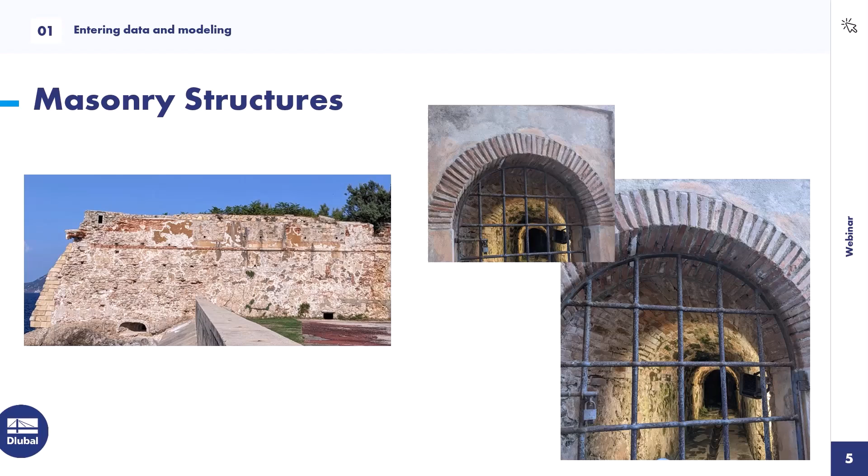This is the reason why I prepared two examples today. One structure as a basement with arched surface on the top, and as the second one, a simple example of a bridge, where I want to show how you can estimate the maximal possible load on this structure using the stability analysis tool. That's all for the beginning, so let us start and switch to RFEM.

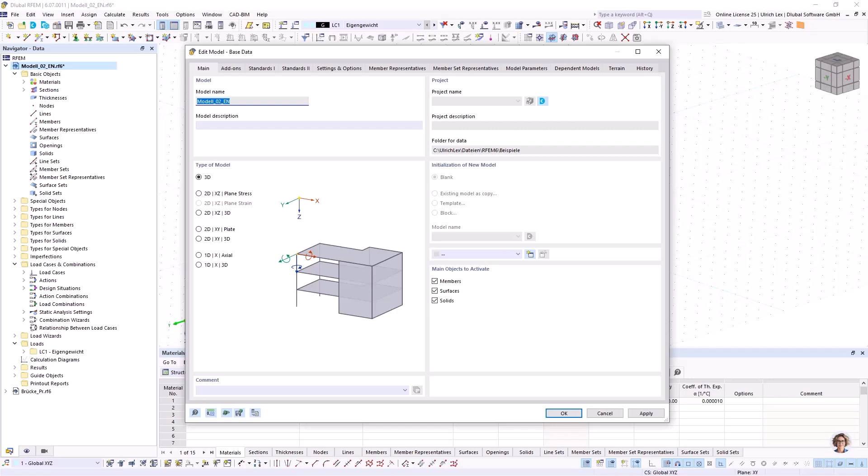So I already created a new file in RFEM. The first thing I want to do is take a look at the base data on the main sheet - there's no changes for the default settings. What I want to take a look at is the add-ons. Here I have to check our masonry add-on to get the things I need for masonry.

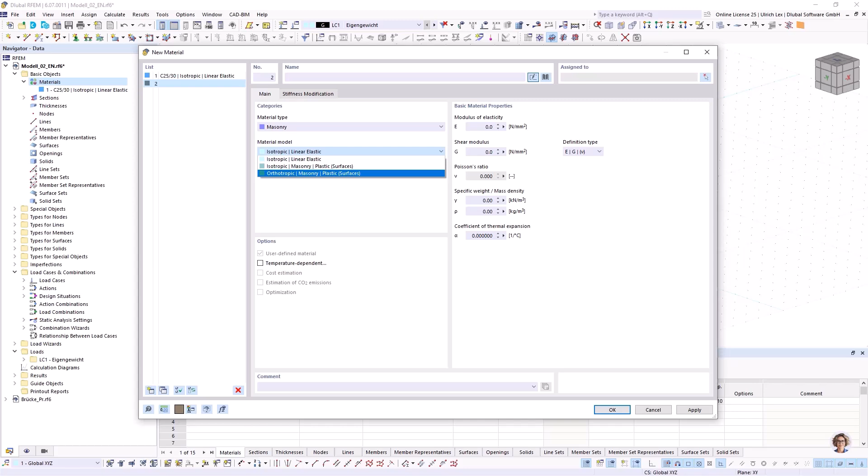When I have done this, I can continue with creating new things. At the beginning, I want to create a new material. One material already exists, it's a concrete, which I want to use for the foundation maybe. The second will be created new. I choose the material type masonry, and here our material model orthotropic masonry. Go to the material database, select our masonry and select one special material, continue with OK. Then my needed data is filled in automatically, along with the parameters I need for the material model. The first step is done, the material is created.

The second step, I want to create a new thickness for my surface. At first, the foundation, maybe 250 millimeters. Apply, create one new thickness with masonry, and continue with OK. If I have done these settings, then I can start modeling.

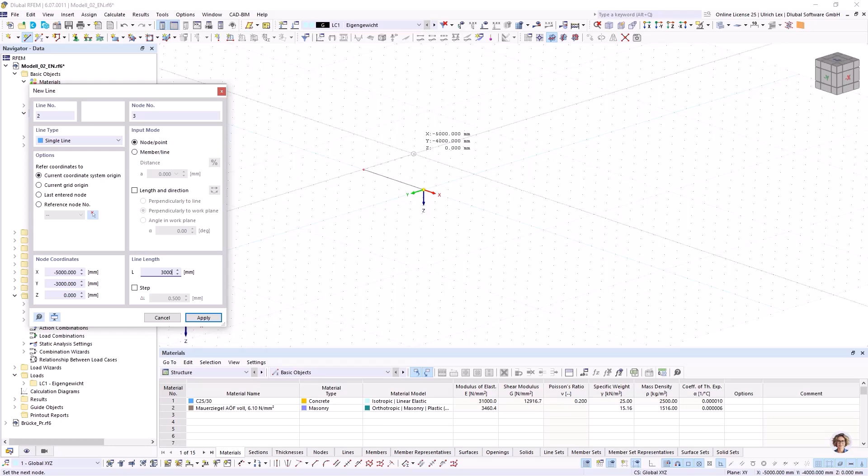My building is a very simple building, so I can create it only with lines or directly with surfaces, and I don't have to use any data import or DXF file. So I want to start here and have in this direction 5000, here 3000 millimeters. I can also change this from millimeter to meter - it's maybe better for bigger buildings.

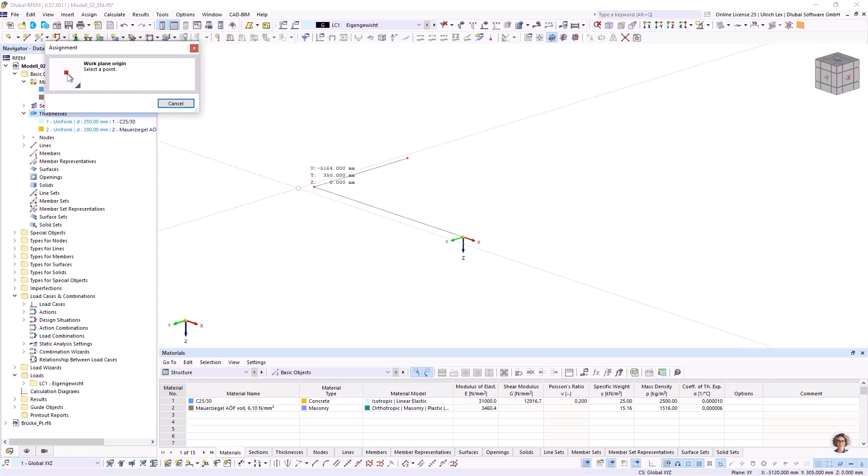So I can copy this line and create the line in the front. I can switch the working plane. I had to change here the settings in options, units, and here the length from millimeter to meter.

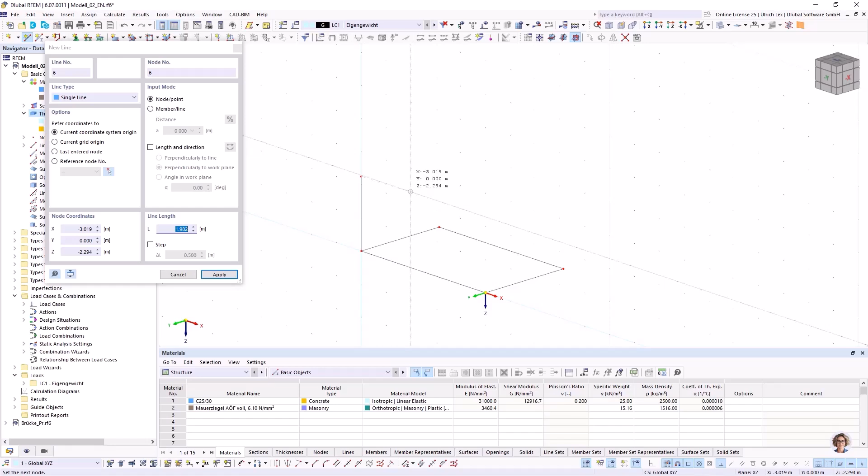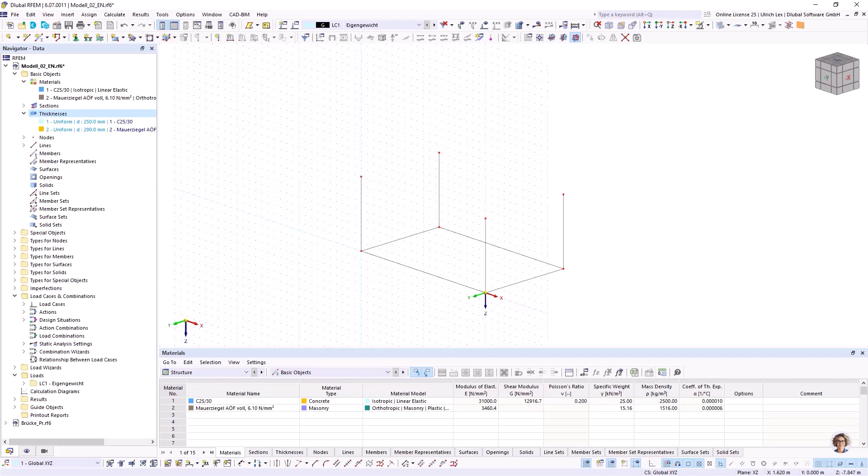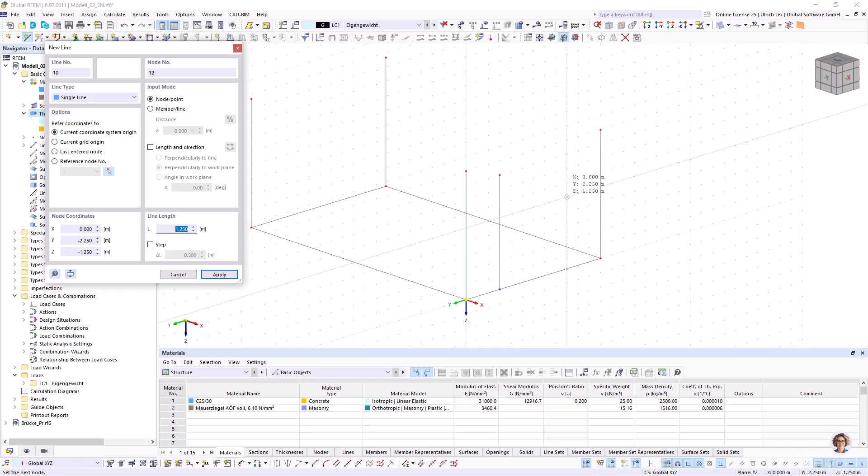Okay, and now my space is 1 meter. So now I can change it. That was what I wanted. I switch my working plane and want to create here one door. So for better modeling, I can now select only the lines in the front.

Can create a new arc.

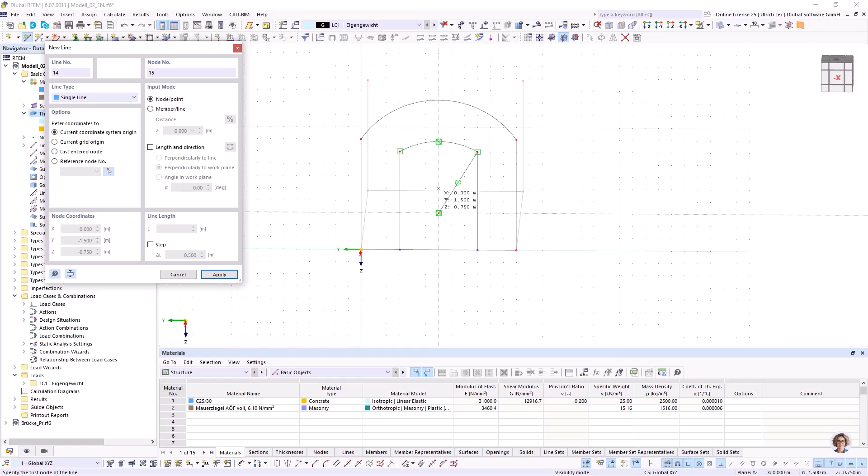Can create here now 2 lines, maybe 2 helper lines. There were created 2 additional nodes. This is not good, so that's why I can use our tool.

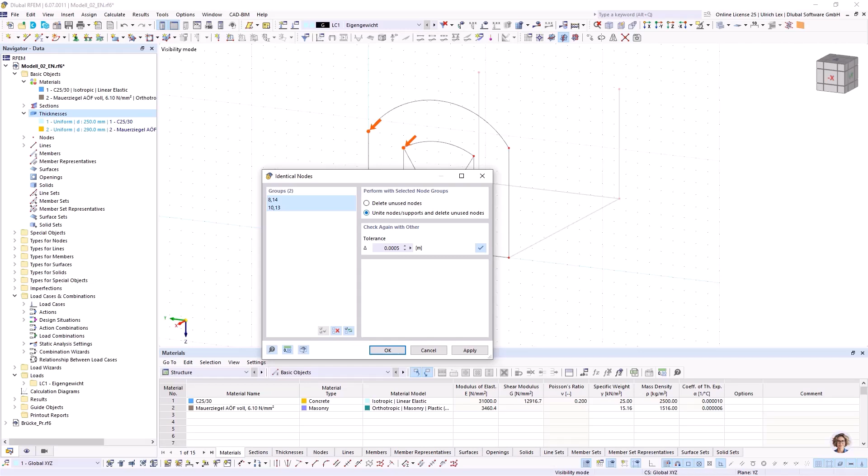Model check and look after identical nodes. You see there were 2 nodes here, and I can use this option, delete the unused nodes. Then there is only 1 node available. Here I created this helper lines.

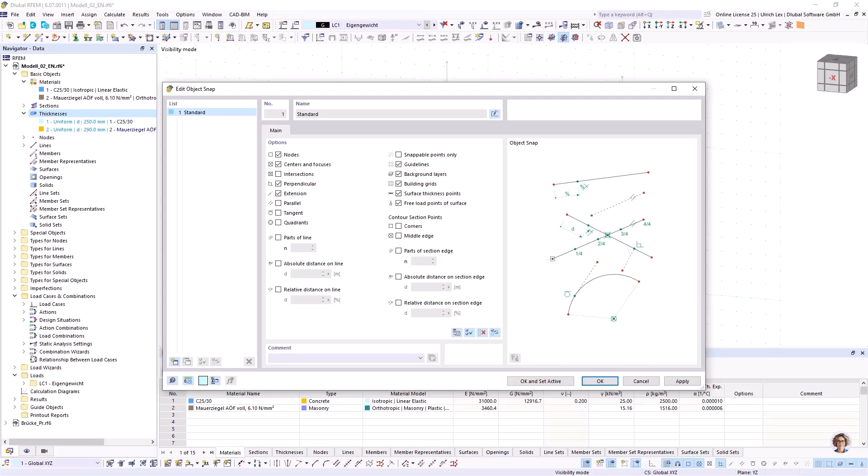I can activate our extension for lines. Then I can choose this node, go a little bit back. When the yellow cross is coming, then I can extend this line and choose my length. The same on the other side.

A little bit back and extend this line. And the next steps, I use this arch again. So after this, I can delete my helper lines.

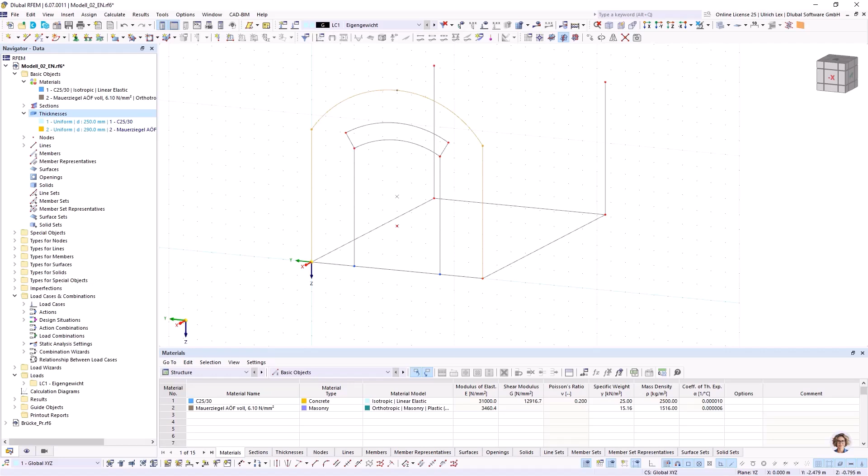So that's easy modeling. I can cancel this visibility mode. I can select the structure and copy it. I can add here some lines. And my easy building is ready.

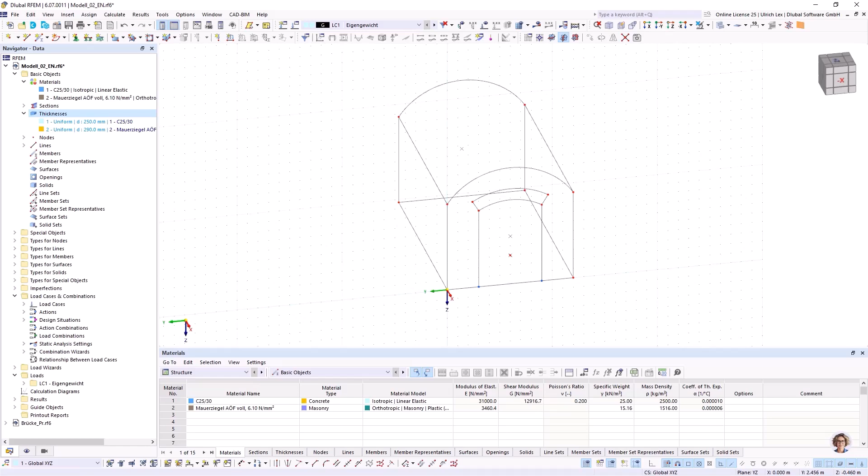I can save this structure, and after that I will continue with creating the surfaces. I use here the option select boundary lines, because now there are all boundary lines available.

For my foundation, I use the concrete material. Okay, select here my lines.

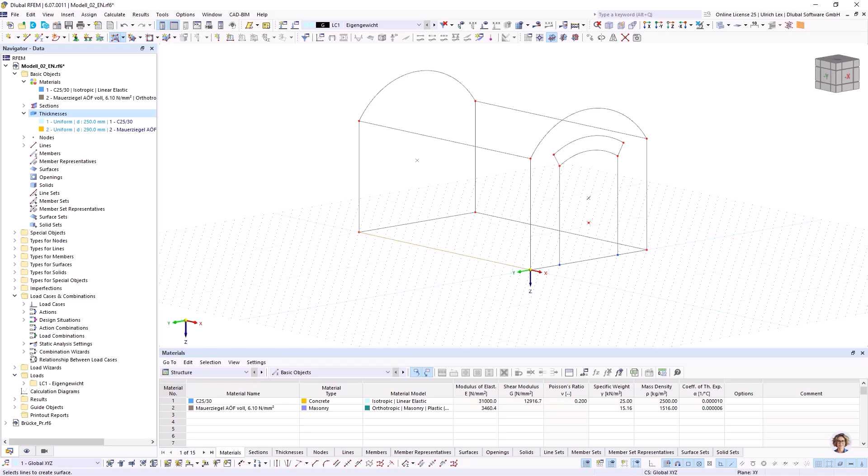So one thing I have seen, here are automatically created nodes on lines. Maybe it would be better to have separate lines, so I can use this option connect lines and nodes. After that, the line is divided and the node is displayed as a red one.

I continue with select boundary lines, choose my thickness for material, masonry, and can create some masonry surfaces in an easy way.

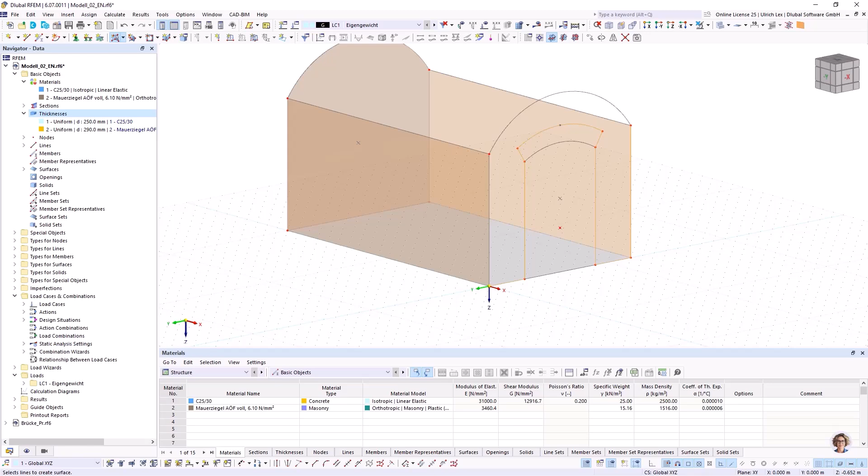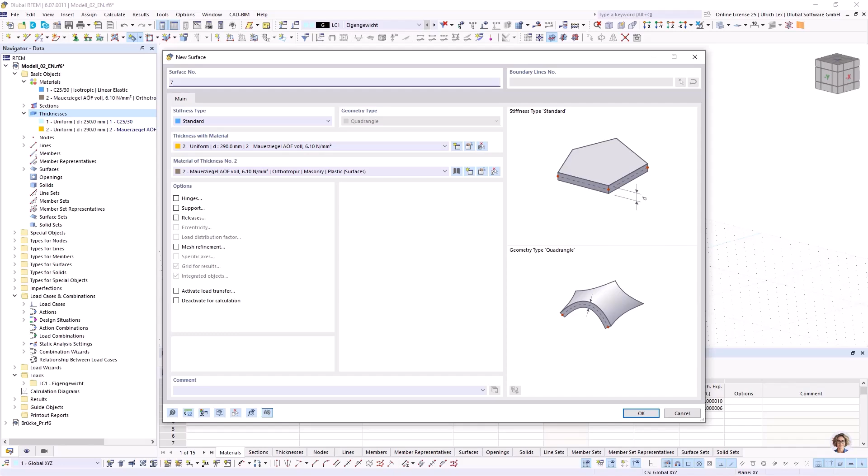So here I want to create a separate surface, and also for the surface on the top I need not a plane surface, I need here a quadrangle surface, also with the thickness of the masonry material. Okay, and choose the boundary lines, and ready is my easy building.

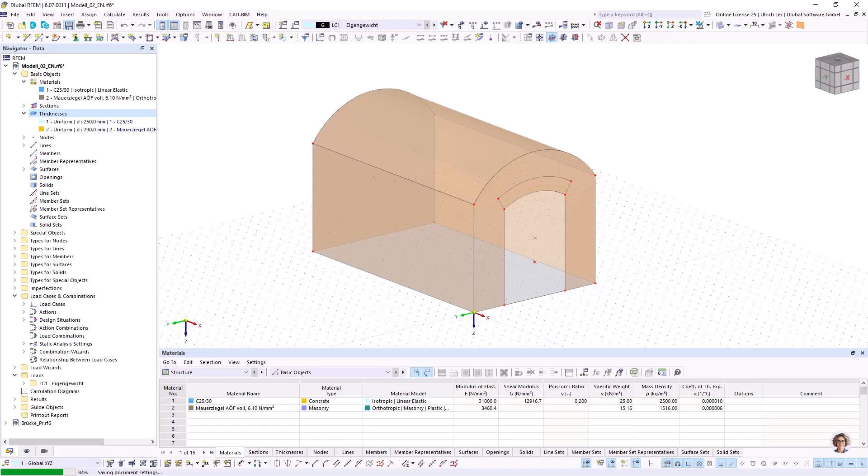So as a next step, I want to take a look at the supports. With double click on the surface, I choose a rigid support.

So a special thing for masonry material is to take a look, one view on the axis systems of the surfaces. For interpreting the results, it would be better that the local Z direction is oriented to the same direction. Maybe it would be good if all surfaces, maybe from the wall, are oriented to the inside of the building or to the outside of the building. So I can explain it later better, because we have here results for the minus side or the plus side.

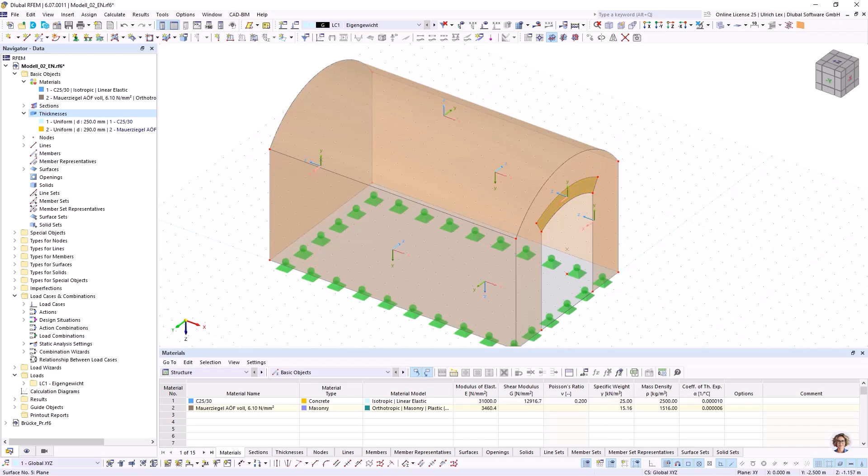And this is connected to this local Z-axis. So I want to change it, that all Z directions look to the inside of the building. Here it's okay. Right click and reverse the local axis system.

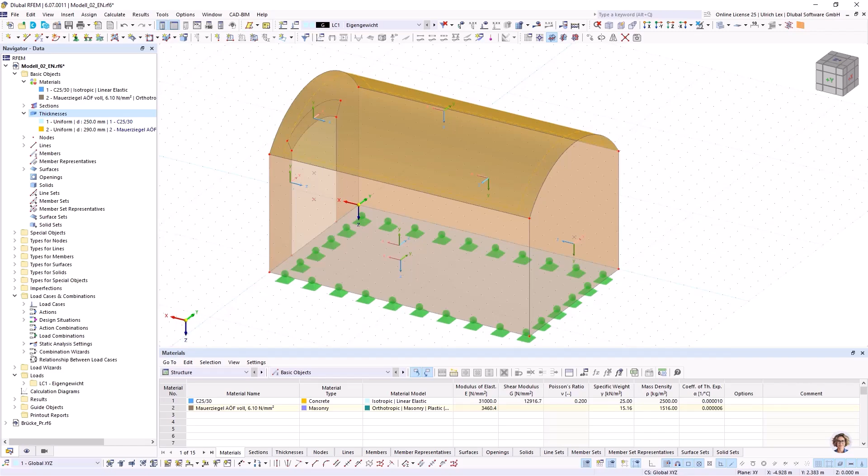And at the last, what's this? Okay. So for this arched opening, it would be good when the y direction of the surface would be oriented to the arch.

This can be done when I go double click on the surface and take a look on this specific axis, input axis, use here axis parallel to lines, can choose my y axis and can define that it should be parallel to this line number 11.

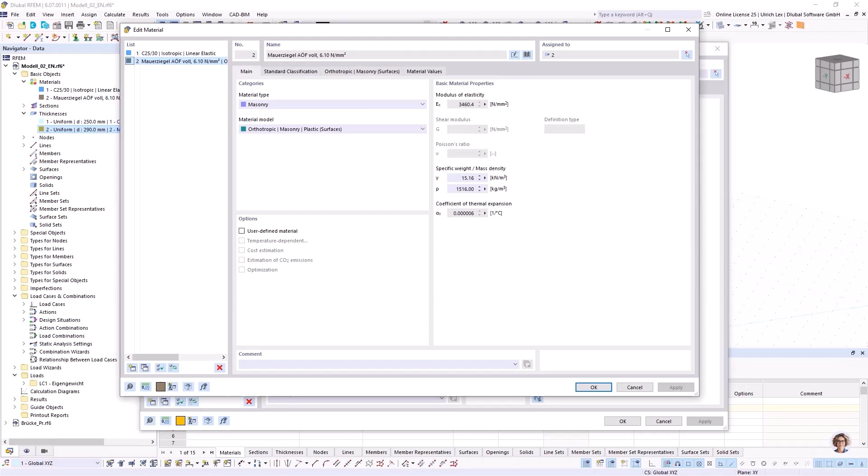It is necessary because the masonry material does have two directions, and the y direction is normally the strongest direction. And this is the direction what the load should be acting.

Okay, as a next step, we can take a look at the mesh settings. The mesh settings of masonry structures should be around 25 centimeters. Of course, it can be necessary that this length have to be smaller.

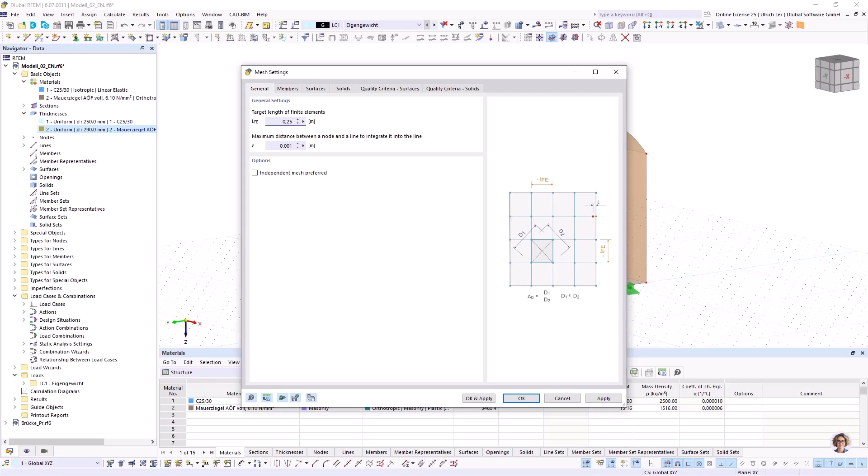Then you can use this. We can use this member or this mesh refinements, or it can be necessary that the mesh settings or the mesh is bigger. But normally it should be used about 25 centimeters.

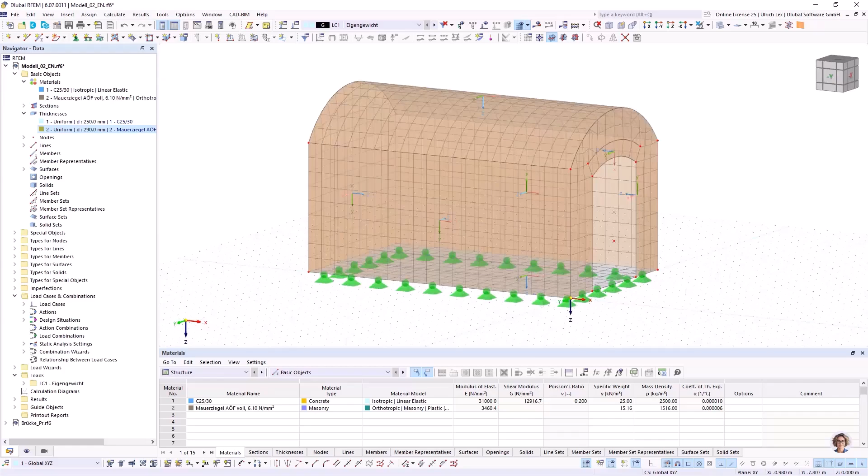Okay, the settings are done, then I can take a look at the mesh. Continue with OK. The mesh will be generated, and the mesh is fine. It's a regular mesh, so I think it is okay for this structure.

Here we see, when I separate this surface, we can see that the y direction is oriented according to line number 11, and it's better to see when I activate the axis system of the FE elements. Then we can see this y direction is oriented according to the line.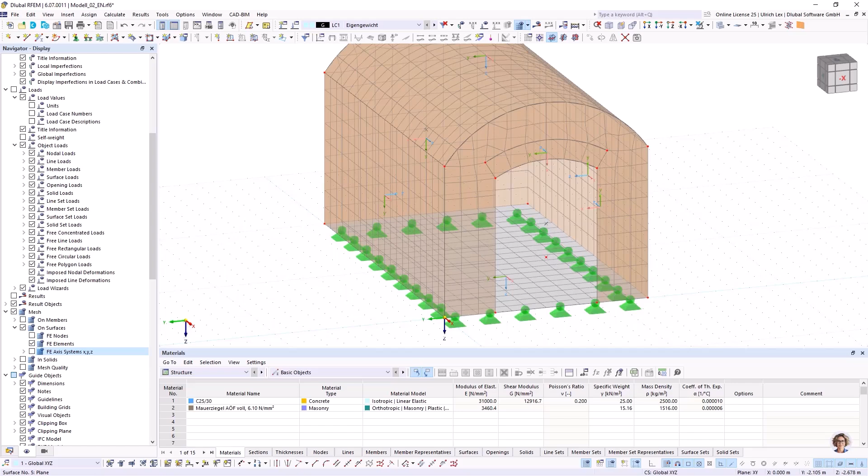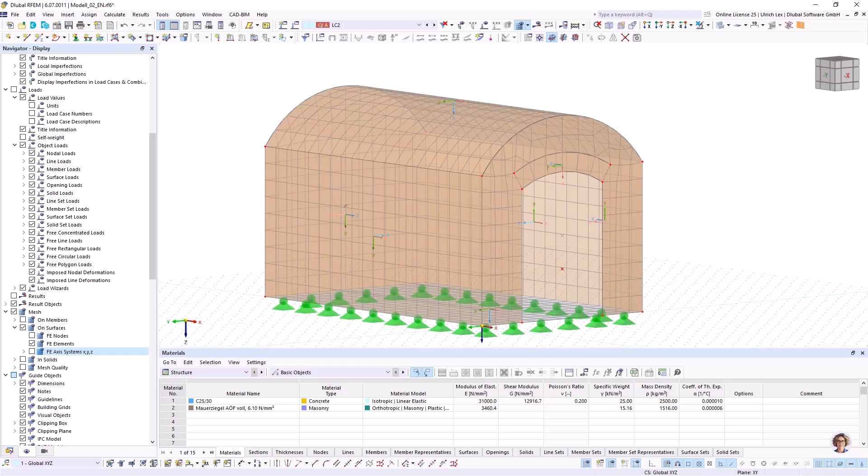Okay, the next step are the loading. Here I want to create a second load case. The first load case is my self-weight. As a second load case, I want to create a surface load with 10 kilonewton per square meter acting as projected on an area.

Okay, the load combinations are created automatically. Here I want to modify

the static analysis settings. For masonry, it's normally used even geometric nonlinear calculation or large deformations.

It's important to set some load increments, so that the whole load is not acting in one load step on the FE element. It's better if you choose here maybe 5 increments. When you want to see the results of each increment, we have the option to save the results, but you have to activate it.

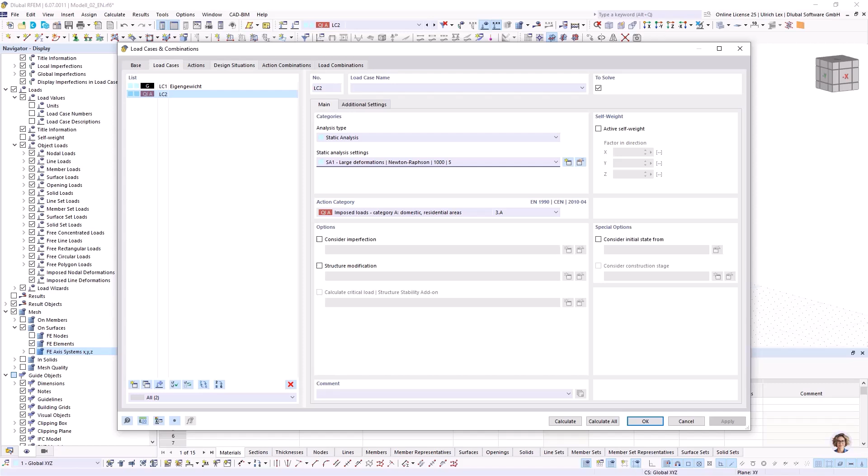Also, we have to set in the combination wizard that we want to use not second order, but the large deformation analysis.

Okay, after this setting, we can continue with calculation of the structure. So I press calculation.

At the calculation diagram, you can see the method of analysis, large deformation. You can see here the load increments where the solver is computing, the load factor, and in the convergence diagram you see the displacement, the deformation of the system according to the load or the load increment.

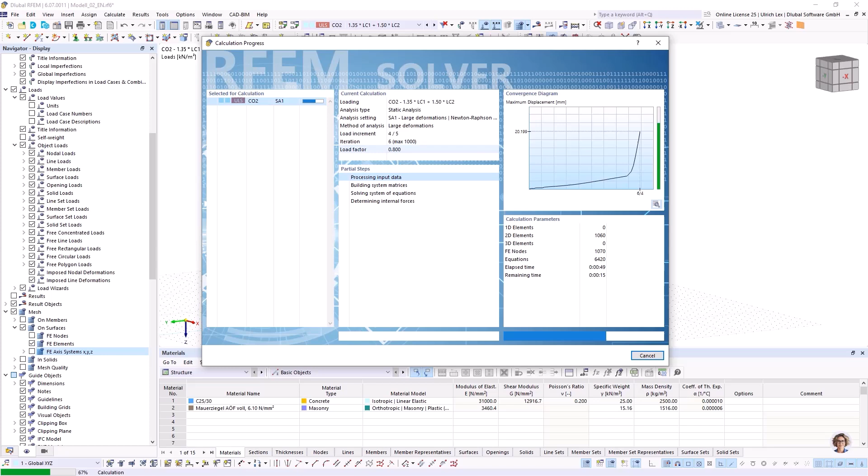Now we can see that the displacement, the deformation, is increasing with the load factor 0.8.

We could now wait until the calculation is finished, but it could be that we have to wait a long time and the calculation will not finish. So I will remember 0.8 and will cancel this calculation at this moment.

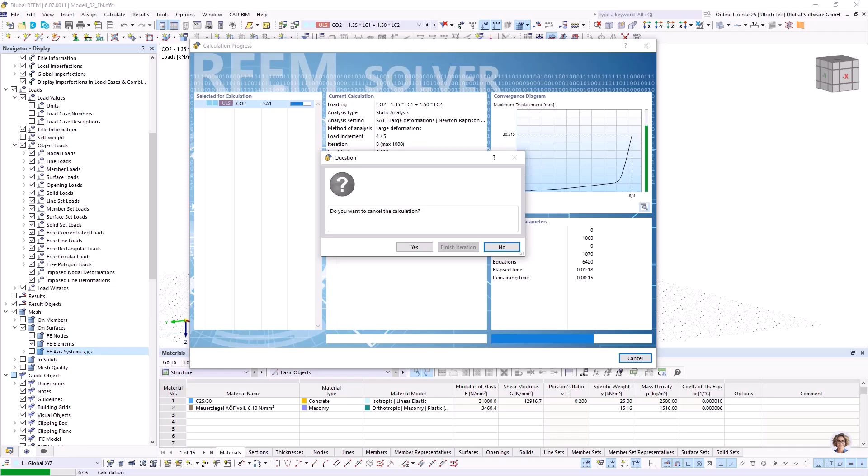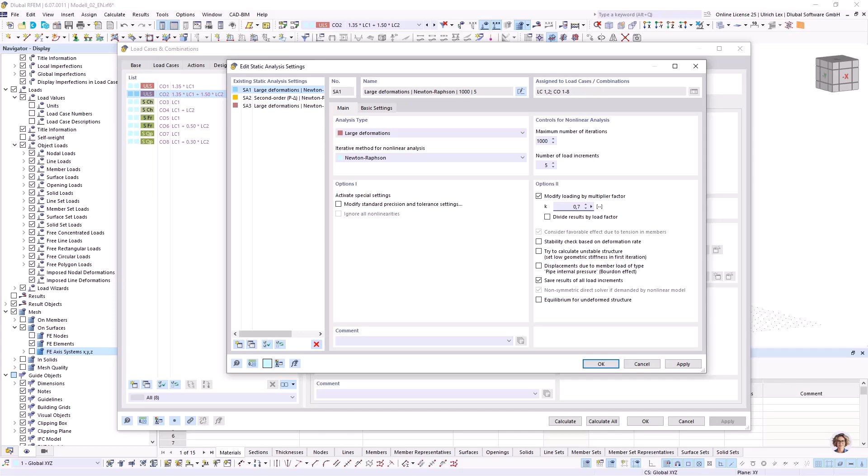What can I do to take a look at the deformations at this load factor? I can go to the load combinations, choose the option in the analysis settings and use this modify loading by factor, and insert here maybe 0.7. Continue with OK and calculate the structure again.

Then we can take a look at the results after this load factor, 0.7.

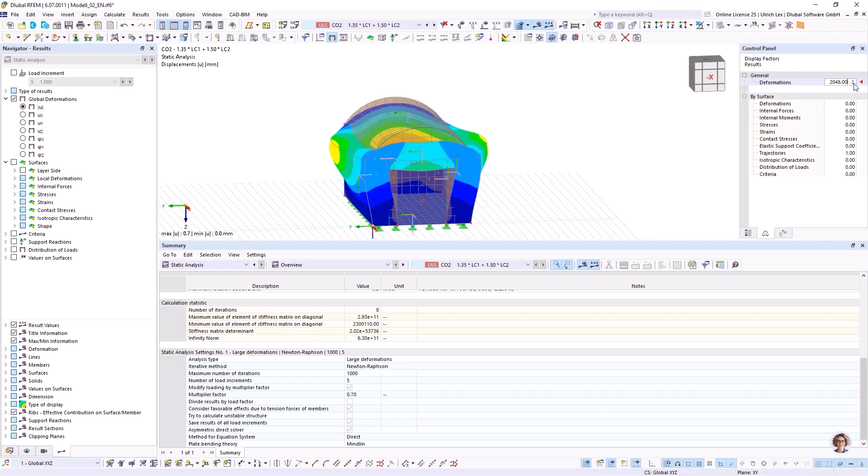What we see now, when we increase the deformations, what is happening? The surfaces on the right and left side get a big deformation. I think it's clear because this arched surface creates some horizontal load, and the masonry on the side surfaces can maybe not handle such big horizontal loads.

So maybe when we have to compute the structure in reality, we have to think now if we forgot something, or what we can do so that it works again.

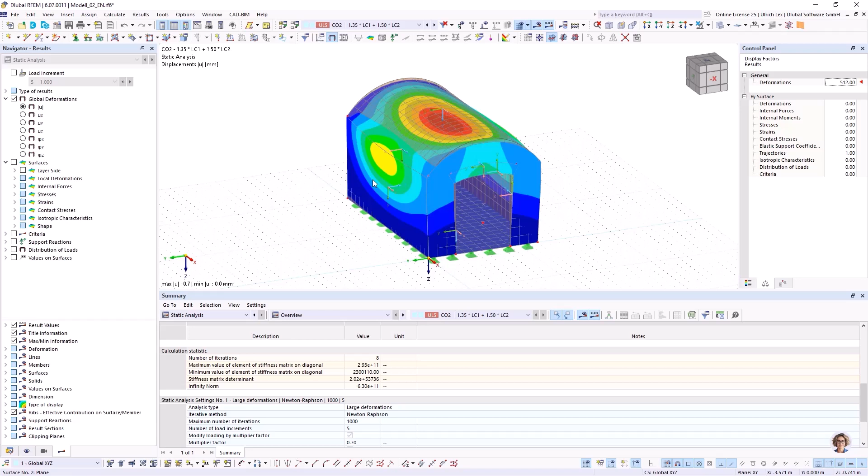There are many possibilities. Maybe we can create a new beam, a concrete beam, like a ring beam on top of this surface. Maybe you can create some additional concrete column,

or what could be done when it is a basement. It could be maybe to consider the earth pressure on the outside of these surfaces. And that was what I want to do.

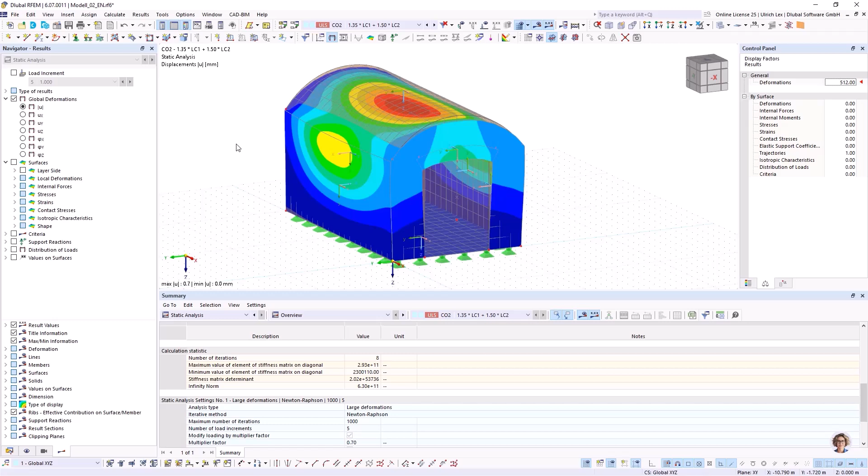Now, with double click, I want to consider some support. I want to create the new supports in local Z direction, maybe some spring constant. Yes, okay. And the same on the other side.

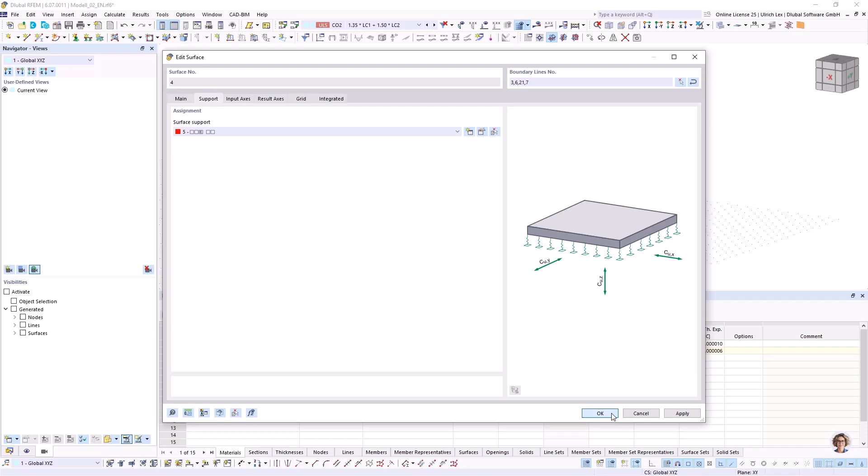I want to change my factor back to 1.0 and calculate the structure again.

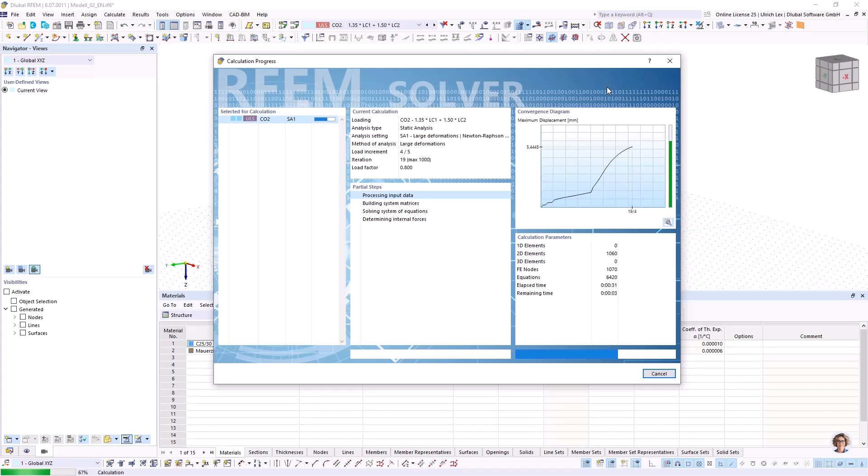Now I can see that the deformation is increasing too, but it's getting horizontal after some time. That means that was the right thing we have done.

Here it is the last load step, and we got more load, and the deformation is not increasing anymore. So the structure is computed, and this structure is okay for this load that is now computed.

So what can we do now for the result? The first thing is we can take a look at the load increments, but we have done it before. One interesting thing is the deformations.

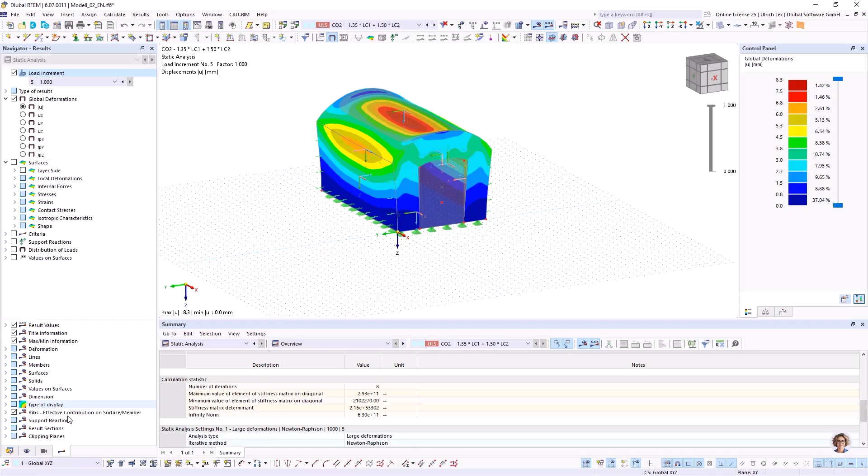These deformations you can also print to the printout report to create maybe a better view. You can insert some guide object and a clipping plane. You can create a new clipping plane here maybe.

Okay, just a moment. We have to see the YZ direction. And you can take off the clipped areas, so you can see this deformation.

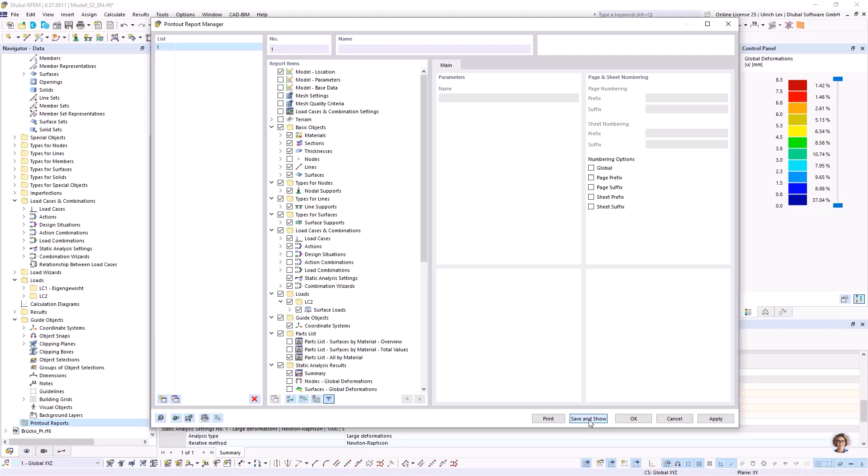We can create here a new printout report. Some tables are activated by default. Here you can activate or deactivate everything you want. Click on Save and Show, and the printout report will be generated.

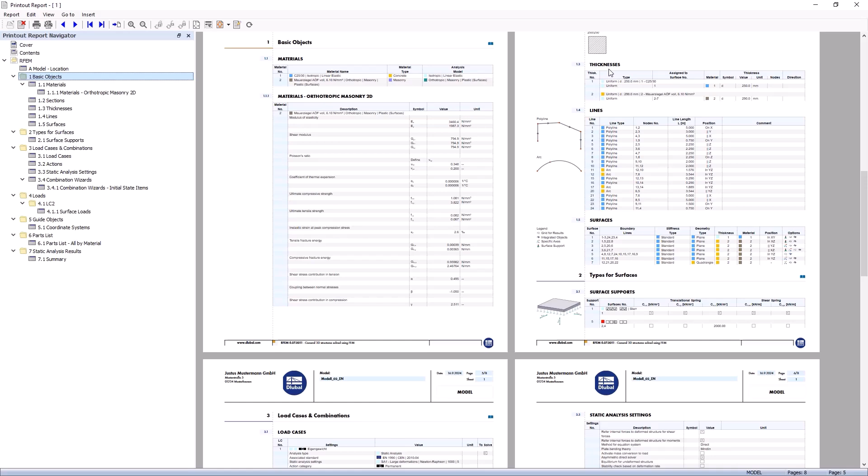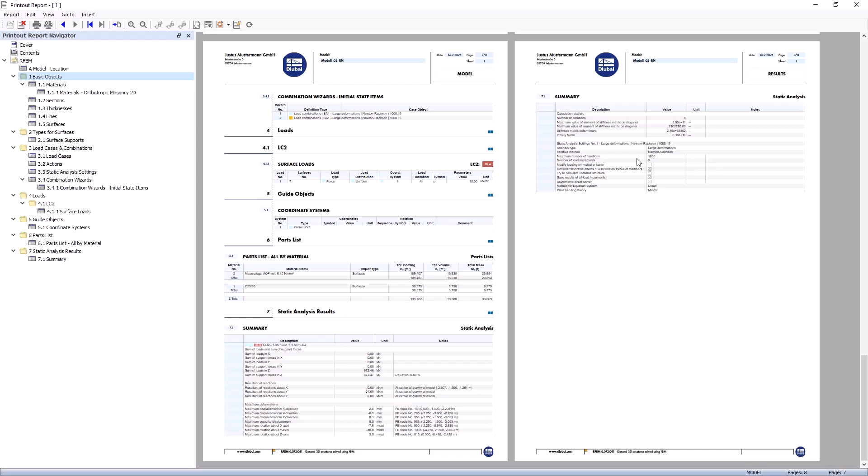Here you have the basic information: materials, thickness, lines, surfaces. You have the information about the load, and the static analysis settings. Here you have the information about the calculations, that it was okay. You can additionally print the needed pictures to the printout report, print graphic to printout report.

You can do some settings, okay, with Save and Show. Then the printout report will open again, and you have this information in your printout report.

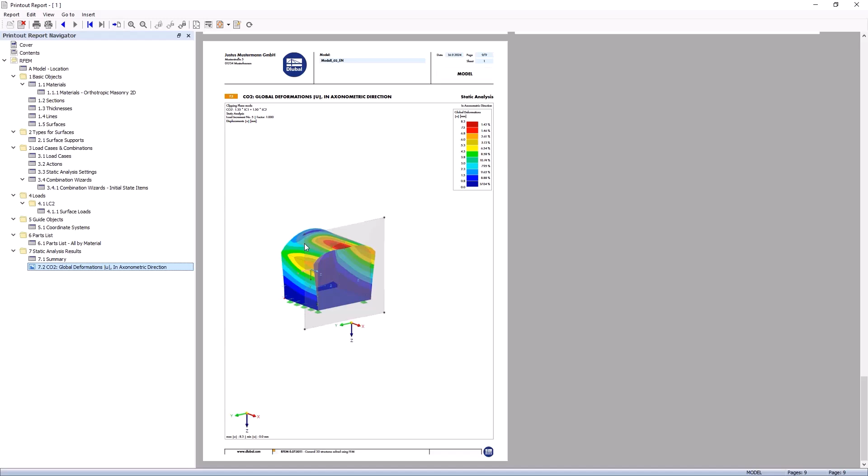So you can easily take the clipping plane off again. What is interesting is always the strains.

The basic strains may be in Y direction, and here we can see these plus and minus results. The plus results are always on the side where the local Z direction is oriented, and the minus side is the opposite. In our case, the results on minus are outside, and the results on plus are inside of the building.

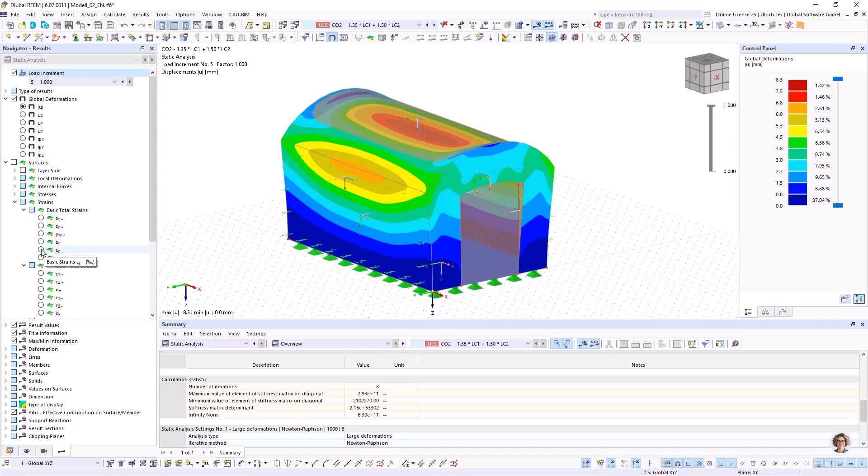When I take a look on these outside results, we can see that here is tension on this edge, and also on the inner side it is tension on the top of the surface. These results are as expected, I would say.

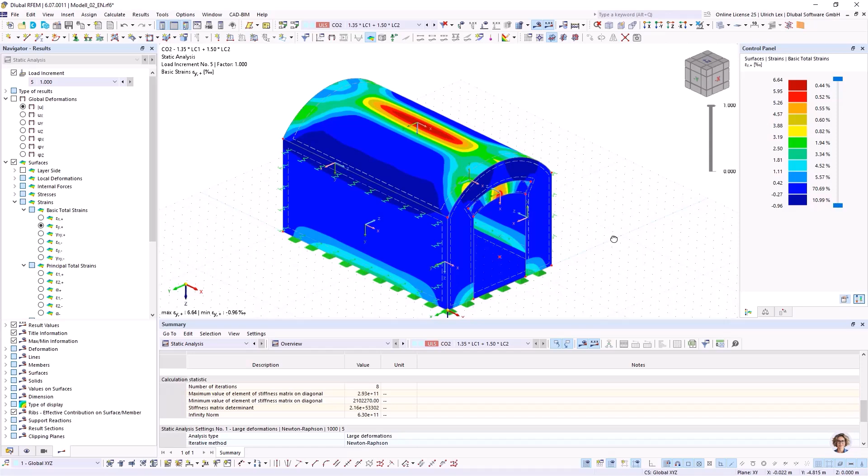Okay, when I take a look now on the outside and inside results on the same place, then you can see if there is a crack through the whole surface. But in our case, on the edge, on the inner side, it's a pressure, and only on the outside is tension.

That was all I want to say to this example, and I want to switch to the next one.

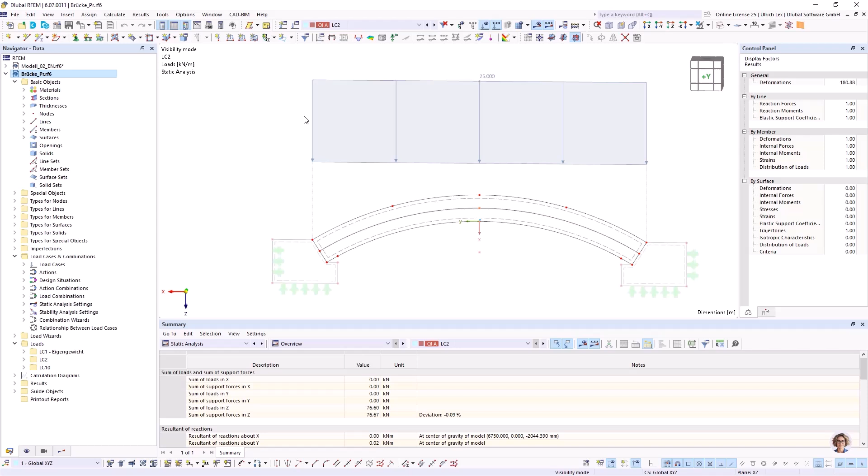Here I already created the file so that we do not have to model it. I created something like a small bridge, I would say. I have my arched structure on the side, some supports.

In the middle of the surface, I created a result beam so that I can take a look on the normal forces in the arched structure.

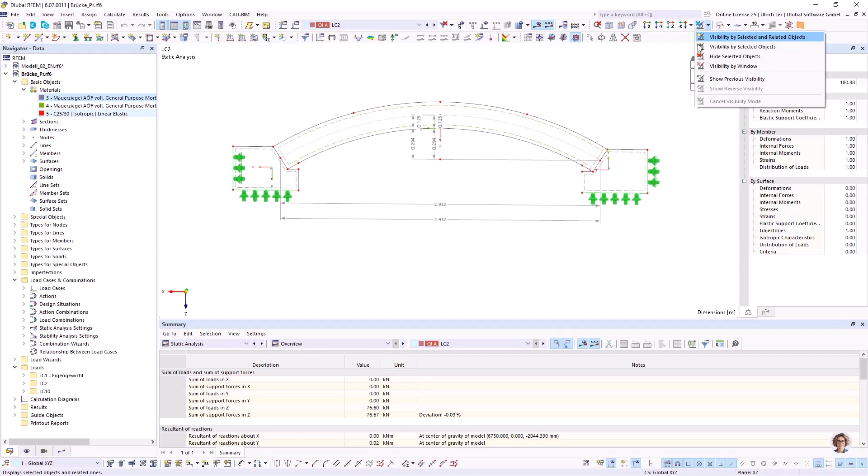As material, I used the same as before for both things. Here, just a moment, I switch off the member. The same material for both things. It's masonry.

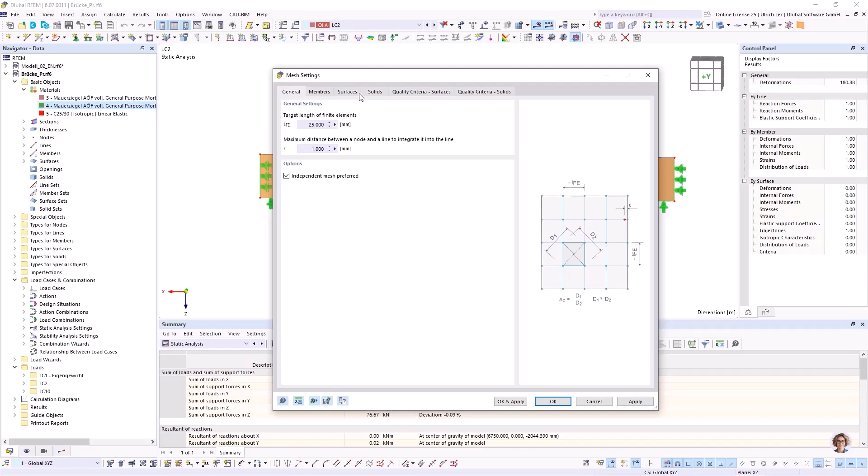For the mesh settings, I use now a very small mesh because I want to see some more details on the mesh, and it is now created as a section. So I have the thickness of the surface in Y direction.

As a load, I created only the same load cases, here with a load of 25 kilonewton per meters.

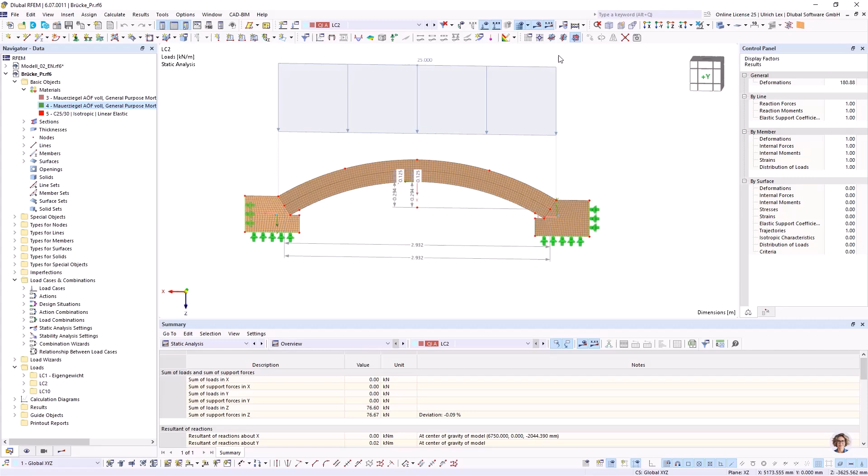So when I create this mesh, we can see that we have a lot of FE elements through the thickness of the surface. When I go back to my model before...

Here we have normally 9 layers through the thickness of the surface. When we take a look on the thickness, then we have 9 layers through the thickness, but we cannot show the results of each layer. We get only results on the outside, on the inside of the surface.

If it is necessary to increase this number of layers, we have this option to do it in the thickness. We can select this option and increase this number of layers from 9 to a higher number. But I think the default setting of 9 is okay, only in cases where I have a really thick surface would you think about increasing this option.

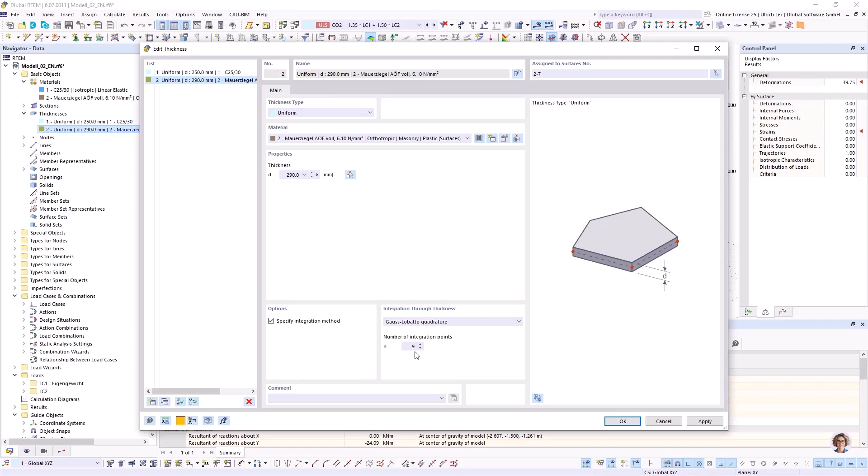So here I have this 25 as loading, my 25 kilonewton per meters. Then I want to know how much load is possible on my structure. That's why I used, in this case, a stability analysis tool.

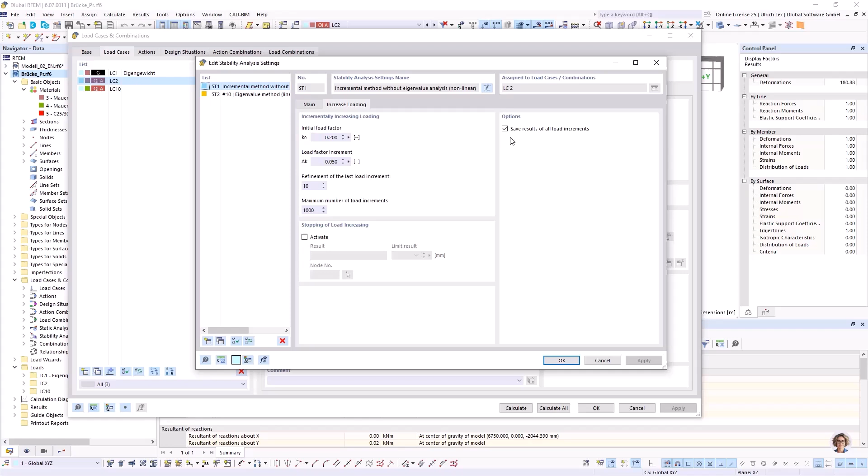I want to use the stability analysis and the incremental method. I want to increase the loading until the structure fails, and to see the results in each load step, I save the results of increments again.

If I compute this - I have done it before because this incremental load increase takes some time - but when I have computed it and take a look on the result, I see that it is possible to increase my load with the factor 2.9.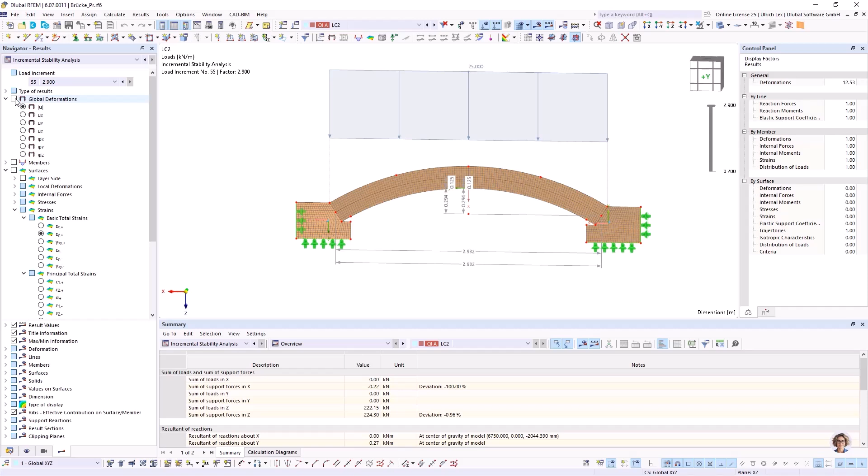And here I can take a look at my deformations. So when I go a little bit to the theory, I want to switch to my presentation.

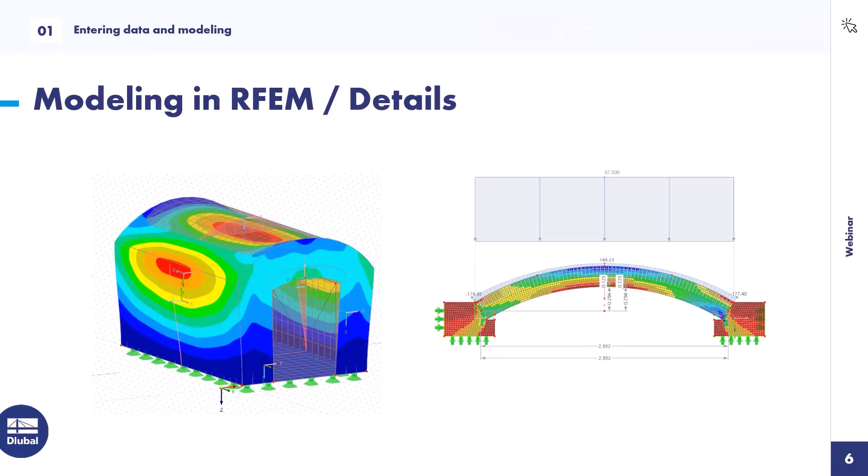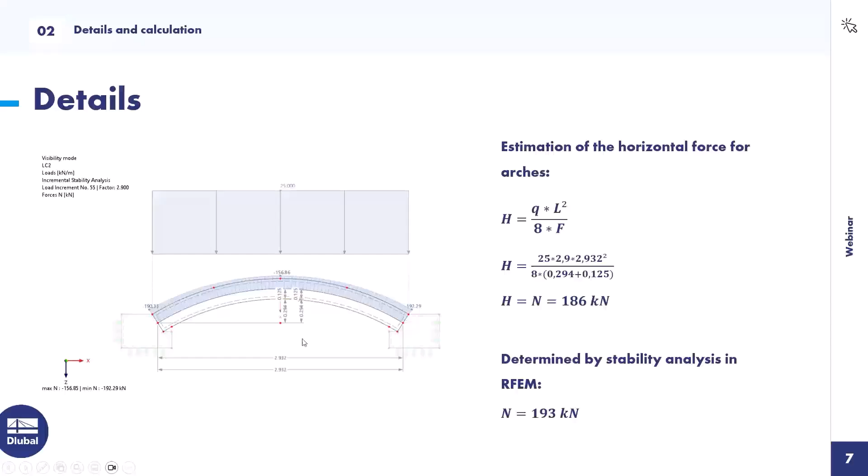It is possible to estimate the horizontal force, or the maximum horizontal force, for such arches by this formula: the horizontal load Q times the length divided by 8f. F is the height of the arch. With this formula I get about 186 kilonewton. In my case, by the stability analysis, I get about 193 kilonewtons. That shows that the analytical solution is nearly the same as the computer calculation in RFEM, so I think it's a very good result from both ways.

I can here show the member force on my result beam, and have about 193 kilonewton.

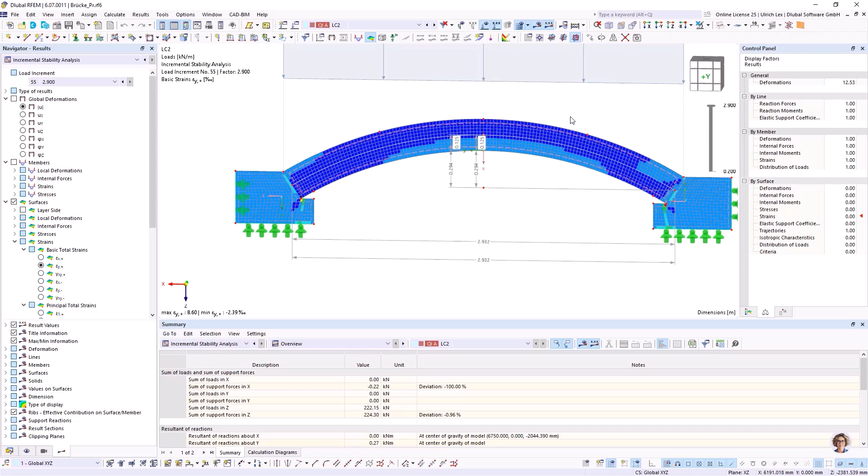So what is interesting again on the surface results? Can we take a look, maybe first, at the stresses. When I look at the sigma y stresses, I see a maximum tension of 0.098.

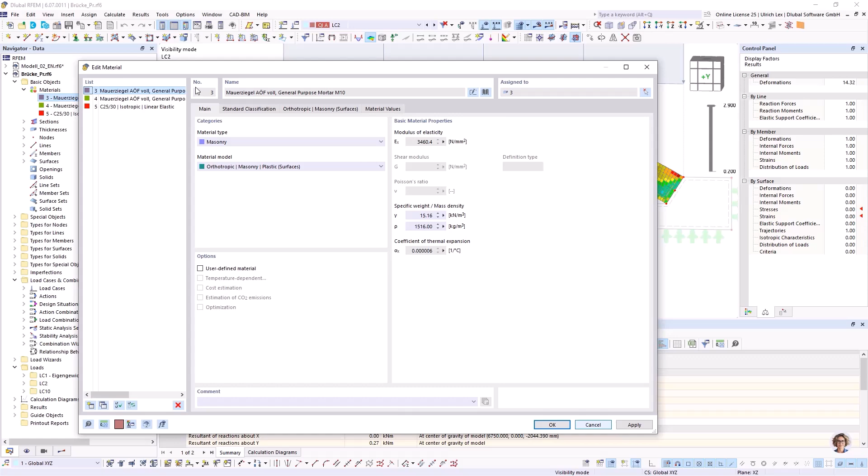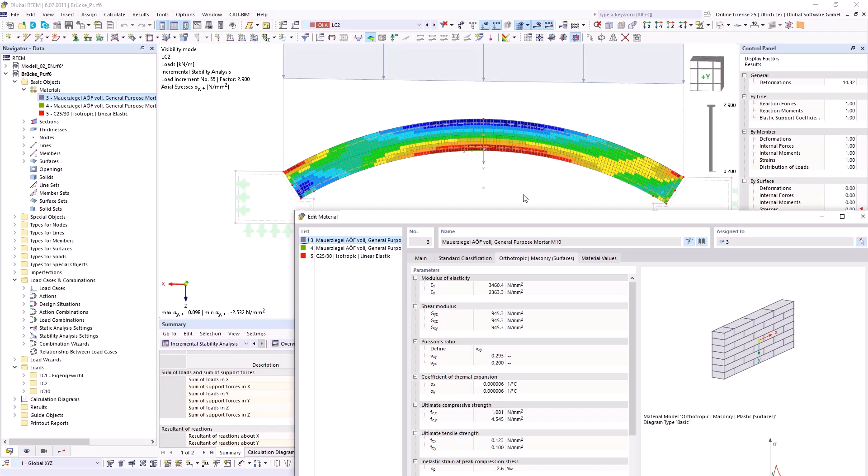When I now take a look at my material, I can see that the maximum allowable stress is 0.1. That's why the stresses are not so interesting, because the stresses cannot be higher than defined by the material. If they are higher in the structure, the calculation will fail and you are not able to compute the structure.

That's why the more interesting things are the strains. Here I can take a look at the epsilon y strains, and we can see here on the downside are tension strains, and also here on the upside.

For documentation, can we now say, okay, here one FE element is about 25 millimeters. Maybe I have here 50 millimeters, 5 centimeters, where I have tension, where I think cracks are possible, and the rest of the structure is pressure. Maybe here about 200 millimeters is pressure. And this is information where we can say, okay, this structure is okay or not.

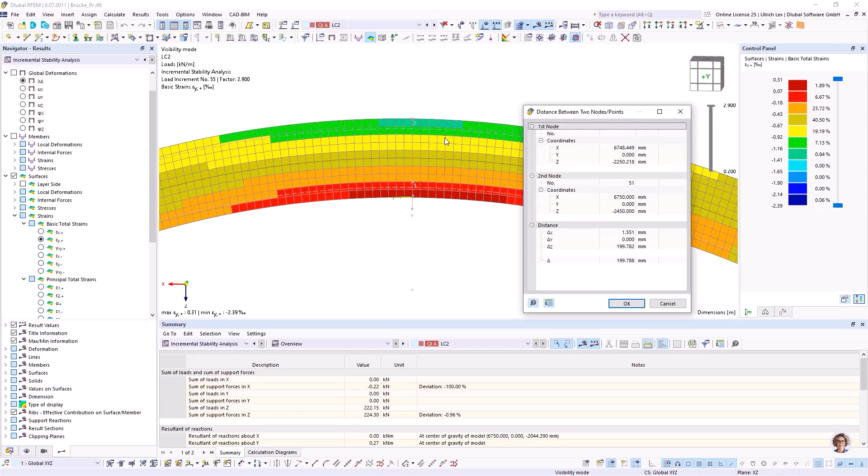So these things, as mentioned before, you can print in the printout report for documentation and to print the results.

One option, or one thing I want to show you, is that, as I said, this stability analysis sometimes takes a longer time to compute. When you look at the calculation diagrams, you can see that the load is increasing until the structure fails. Here is a refinement of the last load step, so this takes a little bit of time.

If you know about this load factor, you can use this option again in the static analysis settings to modify your factor. Maybe use a higher load increment. Then you can do some tests, and the calculation does not take so much time.

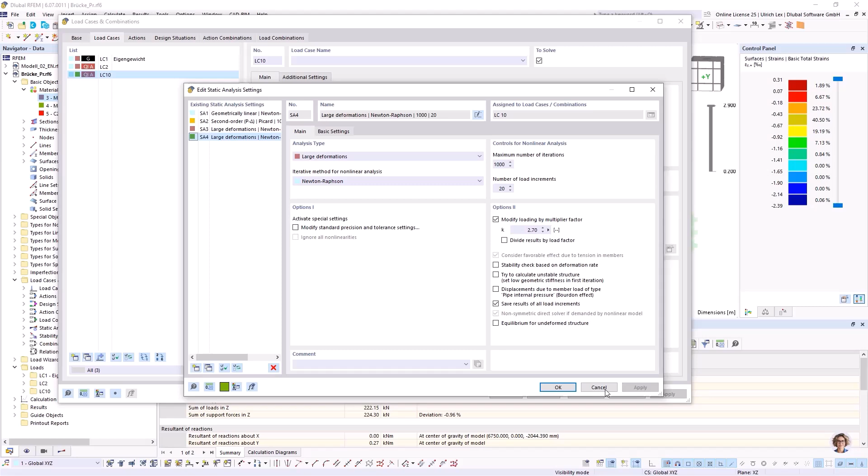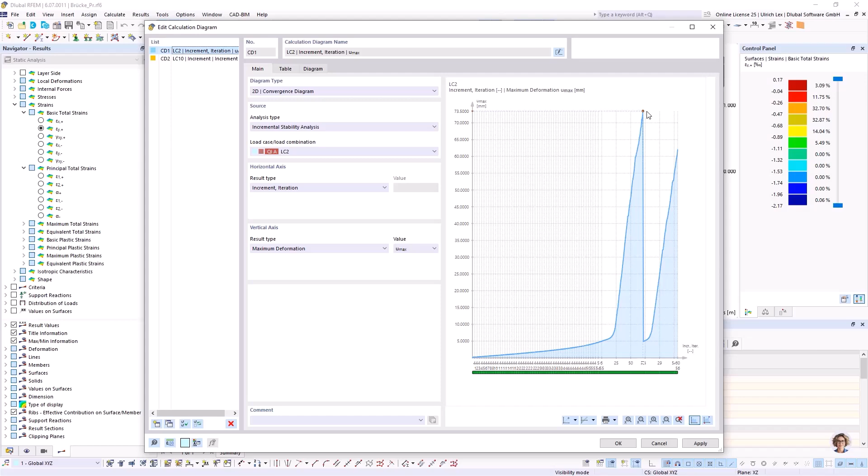Because when I look at this calculation diagram, I have to create a new one, because I do not have this increment, because I do not have this refinement at the end, or the solver does not have to compute it in the last detail.

It's maybe easier to use such a modification, and only in the last step, when I know the calculation is ready or the system is ready, then I can use this incremental load increasing.